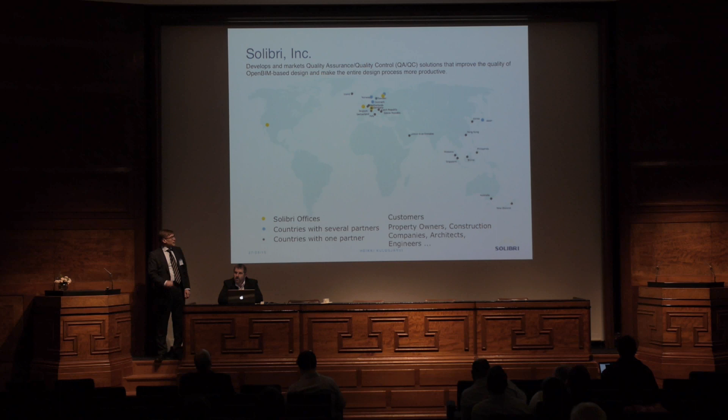A few words about Solibri. We are focused on quality assurance, quality control, and we do that based on open BIM files, so we are not doing anything else, BIM files always. As I said, we are headquartered in Helsinki, having offices here in UK, run by Dave Jellings, also offices in Germany and the United States.

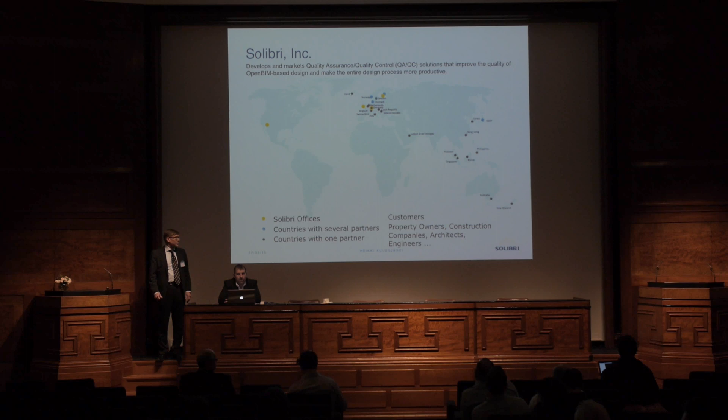Then we have partners, the black dots, over 20 different partners in different countries. Our partners in the United States are not listed here, but there are quite a few there as well. Our customers typically are property owners and construction companies - these two groups typically have most to gain when having good quality. Also working with architects, engineers, and also lately inspectors.

Solibri is about rules, having checking rules of different kinds, and we have quite a few of them. Don't worry, I'm not going to list all of them or talk about all of them, but I will take some examples of this.

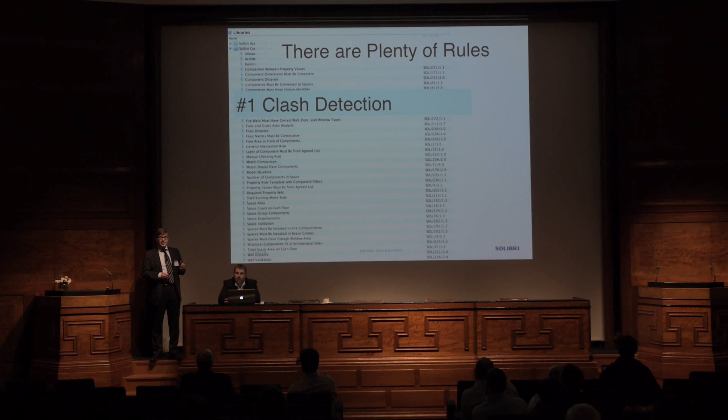For us, it started from clash detection - that was the first thing we did many years back, and we are doing a pretty good job on that. Of course, we think that's the best product in the world for doing just that, but it's only one rule that we are doing. We have quite a few others: whether something is missing from the model, egress analysis, comparing model versions, comparing architectural and structural files, checking if we have load-bearing walls in the same location, and so on.

I'm picking up one of these - rule number 222, component distance, as an example. Here's one use for this rule: clearance. Do we have enough clearance? In this case, this is a picture from Japan, so obviously it's getting a little bit tight.

This same rule is actually a template, so we can twist this rule to do several things. Clearance is one. We use the same rule for soft clashes as well - then we change parameters a little bit. We also use that for making sure certain objects are close by, not further than a certain distance between each other. So it's used for many purposes - these are rule templates that our users can modify to do certain tricks.

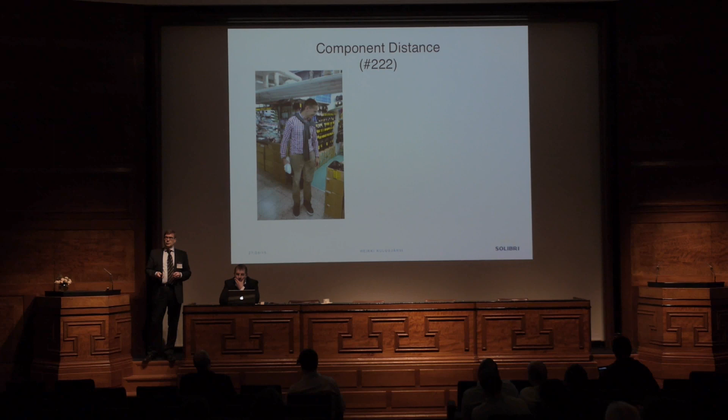They told us they use this rule for that purpose, and the thing is, if I simplify what they think about: you can think of the foundation as a cup, and then you have your columns inside that cup. But because of earth moving, you need to have clearance so that concrete doesn't hit concrete. They use this rule to check that there's enough clearance. So this same rule is also an earthquake rule - very interesting, I'm so delighted to see and hear that these things work like that.

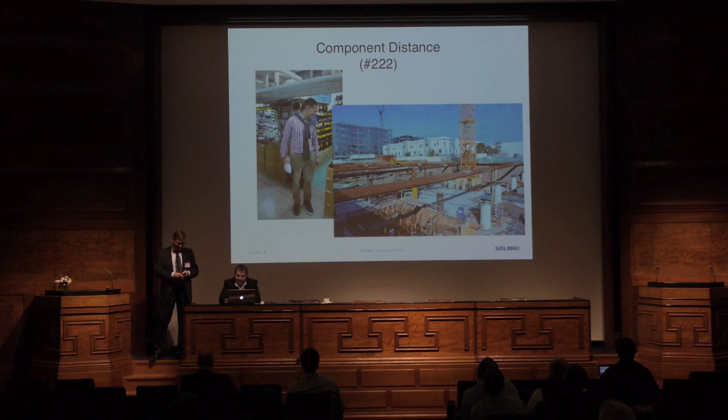And all these rules can be adjusted.

Today our main issue is to talk about COBie - we selected this as one of the things we do. Earlier this week we introduced the accessibility rules that we have in Solibri Model Checker. Maybe some of you saw that - did any of you see it? Not anyone in this room. Okay, but this will go through many of the basic steps that Solibri is doing, so that's good.

I guess this is a good point to give Simon the opportunity to show the real stuff. Simon, please.

The first great starting point was a mention from the last presentation about the quality of the output. Everything we're basing our COBie deliverable on is related to the IFC file that we're pulling into Solibri, and the configuration of that IFC file is of paramount importance—understanding the options and checks you can carry out.

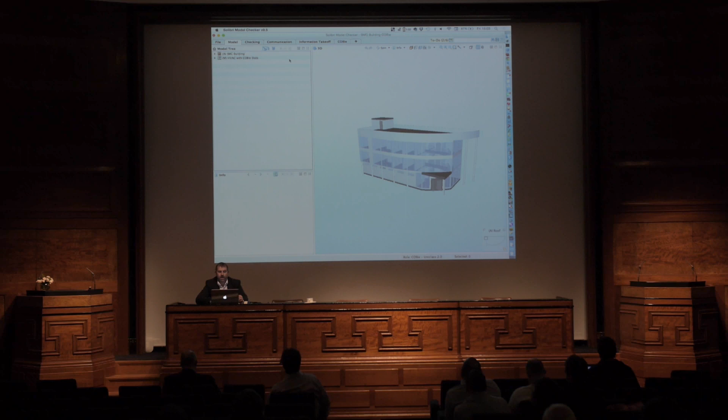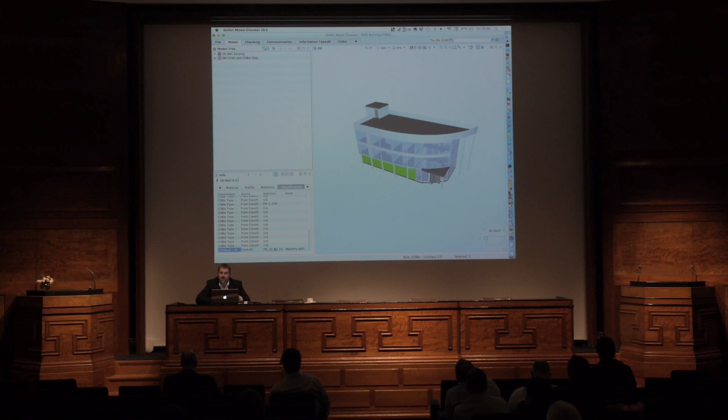Okay, so first of all, if we look at the model itself, if we just select a component in the model, so this wall here, down the bottom here we end up with the data that's been exported from the IFC model. And then when we click through the different tabs here, you can see that we've got certain information that's attached to it. And if we go to the classification area here, you can see we've got a Uniclass classification. Okay, it's Uniclass 2 because that was when I originally created the file. But you can see it's got a classification that's been applied to it. So there's data that's placed in this model which can then be used for COBie.

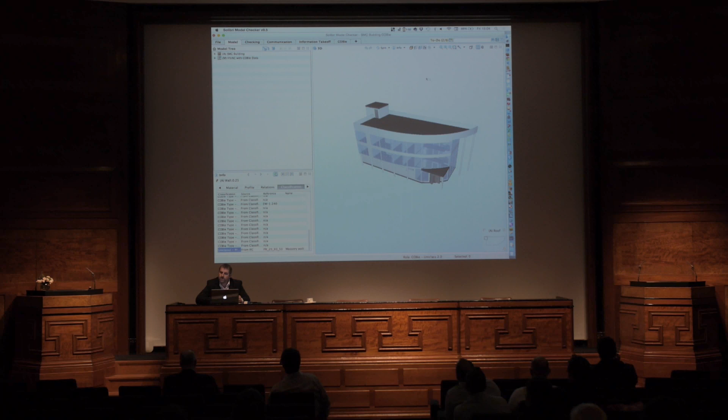Now what we're looking for is a consistent set of data in a relevant set of locations. Now, Solibri Model Checker gives us the ability to take the relevant pieces of information. And actually, depending on however many applications we take the data from, they may have put the data in different locations. The classification system, and this is something to be aware of, classification inside Solibri does not mean classification as far as things like Uniclass, New Rules of Measurement, that type of thing. Classification is a way of restructuring the data in order to be able to visualize it, use it, manipulate it, pass it into rules, that type of thing. So it's a different lens on the view of the actual model itself. Hugely powerful and gives us lots of flexibility.

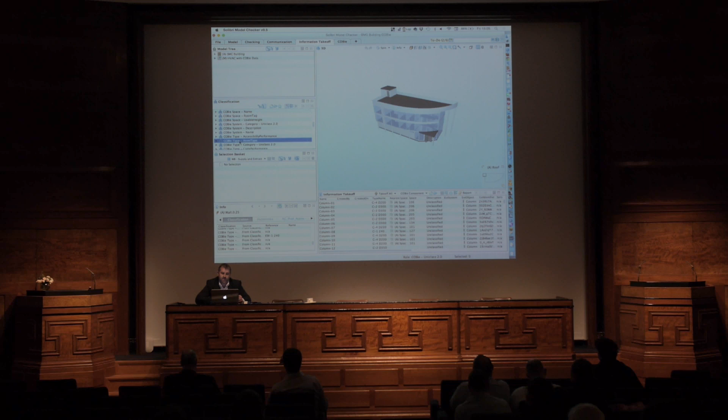Now, I've just used it for one other purpose here. So the idea behind this is that for each of the fields in the COBie spreadsheet, I've created a classification. If I go down this classification and I take something, for instance, like the asset type. So the asset type should be one of two values, either movable or fixed. And if I open this up, it shows me the values that have been created. So as I click on this item here, it shows me all the components that have that value set within the different authoring systems. We also have one that says not applicable, which means they haven't bothered setting it at all. Okay? Or we've got the mapping incorrect.

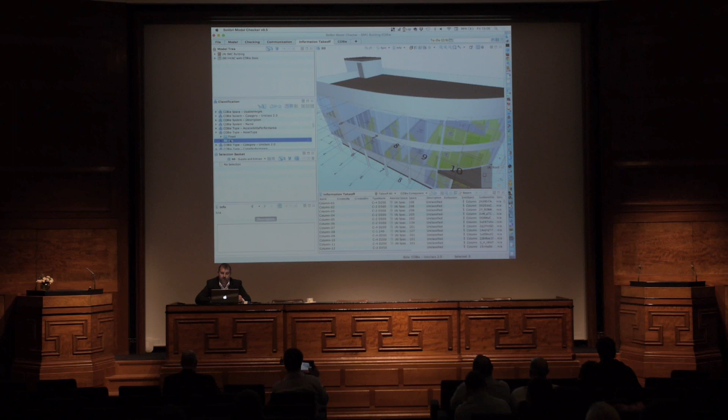Okay. So if I pick on the asset type here and I go to the settings for this, we have a criteria-based sort of application here which goes and looks for data in different locations. So I've automatically set the template up in the background to work dynamically for the architectural tools for Revit and for ArchiCAD. Bentley's coming online very shortly, and so is Vectorworks. But if they conform to the default IFC locations, I have very little work to do. So both of them seem like we can get the standard definitions out for this information.

So for instance, if I look down this list here and I'm looking for type asset, what this actually does, it says, if I'm looking in ArchiCAD here and I find a value, if I double click, I go to this property set to go and find it. So the guidance for ArchiCAD is that they put the data in the relevant place, and it's meant to be under COBie asset and asset type here. So it goes away and looks in that directory or that property set for that piece of information.

For Revit, because they don't create property sets, you have to actually use the default property sets that are inside the software. Everything gets placed under an area called data. Now, there is a possibility of mapping that out and putting it back to the COBie asset area.

The trouble with doing that is if we remap it out, then the IFC file that we export doesn't represent the model that's in a Revit format. So there's some sort of disconnect there because we're not really supporting the ability to create true property sets. But what we've done here is we've created the mapping system. So for any software, wherever they put the data, it doesn't restrict you to change that location.

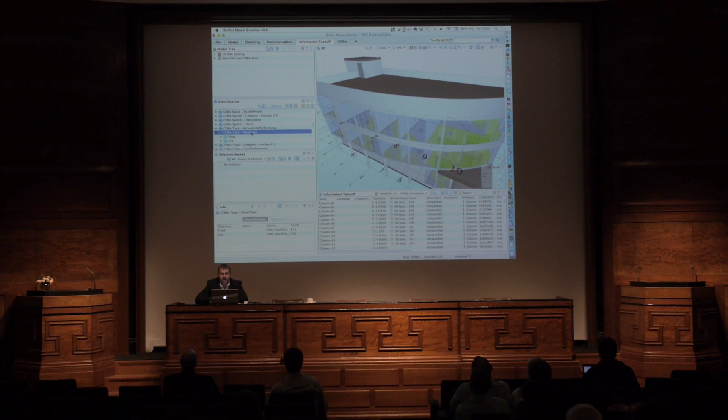So the key thing is this gives us a combined list of the data for each field in the model. So if we had 10 models in here, we could specify where the data is, and it gives us this one list. Now that list provides two pieces of functionality. It provides a route to actually populating the sheets once we're happy with the data that's there, but it also gives us the ability to drive the checking of that data from this location here.

It also gives us the ability to say what kind of elements do we want to actually check in this list. So for a type element, we might not want to check sub-assembly elements of things like curtain walls, that type of thing. We may want to check the main element. So it gives us that flexibility.

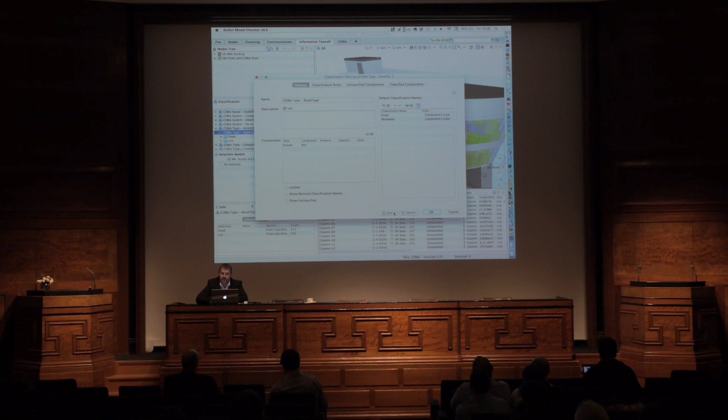When we go over to the checking area, we can then go and pick which software was used to generate the architectural model. Now, the architectural model is the key one because it's going to generate the first load of data submissions. So your COBie drop 1s, your CIC stage 3s, basically up to 3s. And the idea really is that they'll contain the spaces and the zones and the facility information, the floor levels, that type of information. So it's key that we pick the architectural software as being the major definer for the zones in the building.

And I've already set up the ArchiCAD and the Revit ones in there. The model here is an ArchiCAD architectural model, and an M&E model from Revit. So I would pick ArchiCAD here from this list. And what that does in the background, it tells the software that when it runs the rules, it's looking for the data in the right kind of places. So it's already pre-configuring that in the background.

Then what I can do is say, what stage am I generating the data for? So we have a complete set of rules which are based upon the demand matrix. And the demand matrix in COBie is a copy of the spreadsheet, basically, the output. And on every field in that spreadsheet, there is a CIC stage value. And it's when the data is expected to be populated in that field. So what we've done is we've created the rule set to represent the demand matrix. So at any point in time, if you're the data manager or a COBie coordinator, you can say, what stage am I generating the data for?

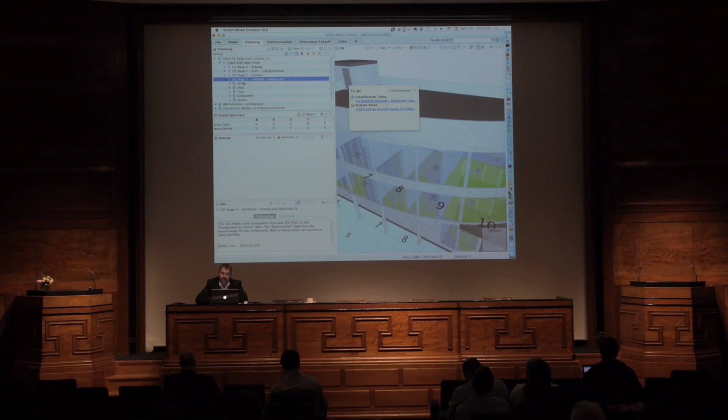So I can say I'm creating it for CIC stage 3. And I say OK to that. And if I open up the rules on the left-hand side here now, the rules drop down to level 3. So I can say here that everything that goes through this stage here, once I fix the issues in that, then I can go through to the COBie sheet to actually then start generating the data.

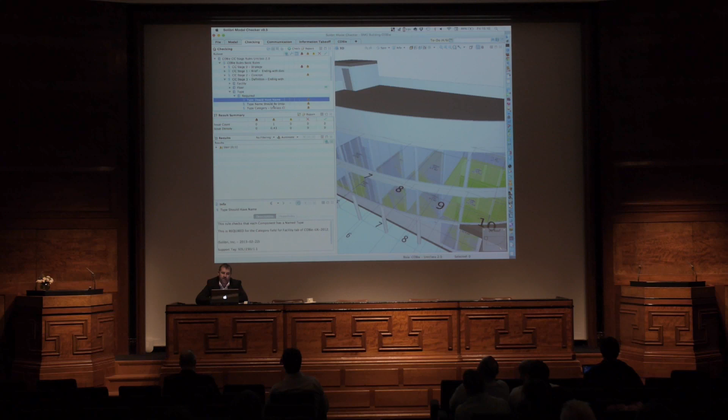So the idea behind it is that once we've got the rules in here, we hit the check button. The check button in Solibri then runs through the rules, evaluates them, and tells us where there's missing components, or problems with components, or data not present. So for instance, if we go to the type area here, we've got required components that should be there for the type. So the type should have a name. If we click on this first one here, it says type should have a name, we can see down the bottom here, we've already got issues.

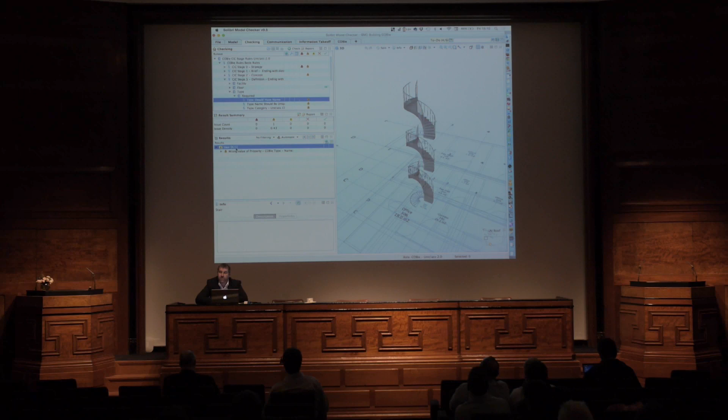So when I double click on it, it shows me the components in the 3D view that are missing data. In this case, they haven't got a type name. And to prove that point, if we click on one of the staircases and we look down into the information with the identification, the field here for type is blank. So the idea is that in certain software solutions, these kind of things are possible. In others, they're not. So we need to be aware of the kind of problems that can actually occur.

If we go down to some of the other issues down this list, if we go down to components, it says components must have name. Okay, so we've checked they've got a name. Okay, that's fine.

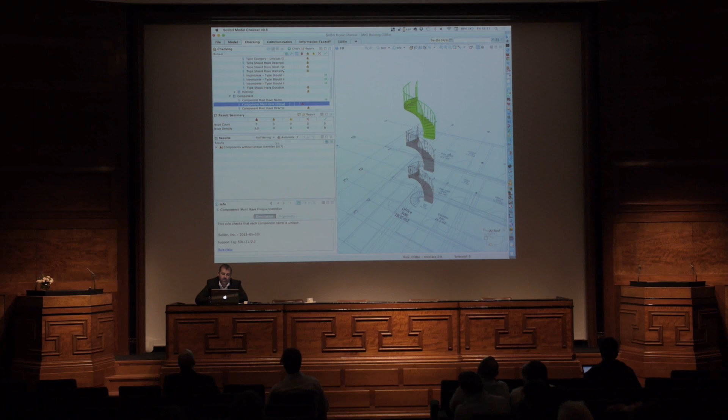And it says the components must have a unique name or unique identifier. So if I double click on this, the unique identifier for a component is in the component sheet, and it's column A. And because we're dumbing down a data source that we're looking at at the moment down to a spreadsheet, what we're actually dealing with is the names of components.

Actually, if we look at it from an intelligent model perspective, every component knows that it's unique because it's got its own global unique identifier, and it has its internal identifier within the software as well. But when we put it into a spreadsheet, we're using the name for that component. The reason why we're using the name is that the system sheet lists the name of the system, but then lists the component names, not the GUIDs or the global unique identifiers.

So a lot of this kind of information we're having to dumb down. The models contain a lot more intelligent information, but obviously we're dumbing it down just to a structure that could be read in by a database from a spreadsheet.

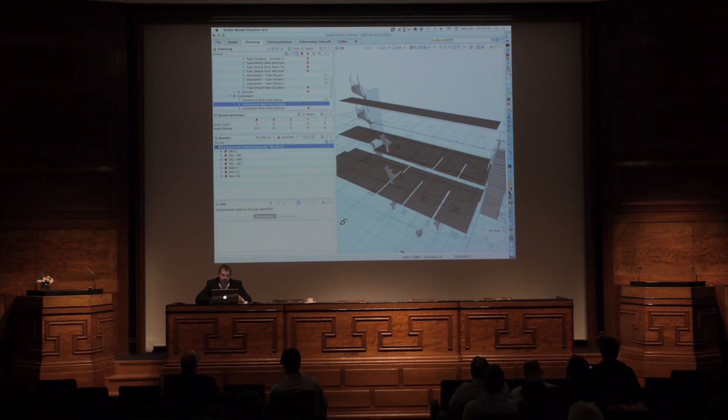So what we've got here on the screen is all these components don't have unique identifiers. So when we go and click on one of these areas here, these walls that we see here do not have a unique identifier. So when I select it, where it says the name of it, which is EW3, all of these have got the name EW3.

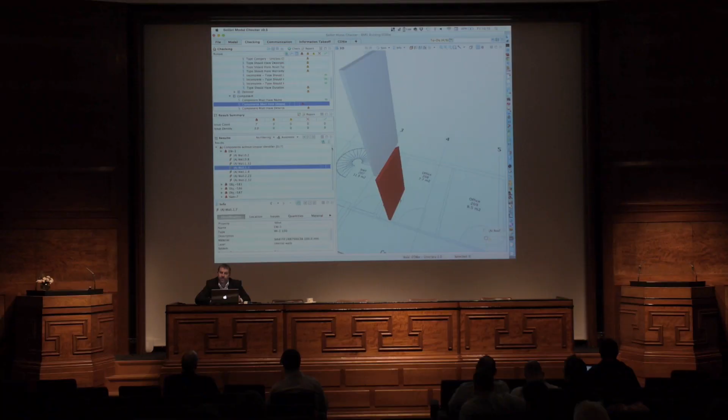Now the great part about this is, and you heard in the last presentation again, once we've found an issue like this, we can right click on it, add a slide, and we can specify what the problem is. When we go to the Components tab then, it lists all the components, and those components go into the BCF file, if we export a BCF, and can then be dynamically passed through to the design teams to fix those issues. We then get the resultant IFC file back, and hopefully when we rerun the rules, it fixes the problems. We don't have the problems anymore.

So the idea is we run through this section, making sure each of these items have been fixed. We get the new models through, push the button again, and hopefully they should all say OK, or they should have a tick next to them.

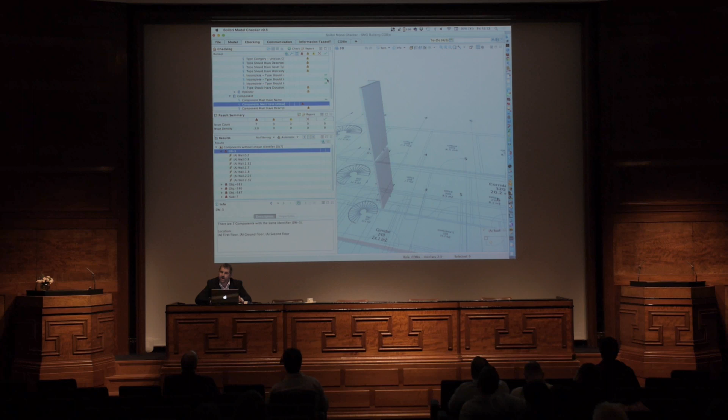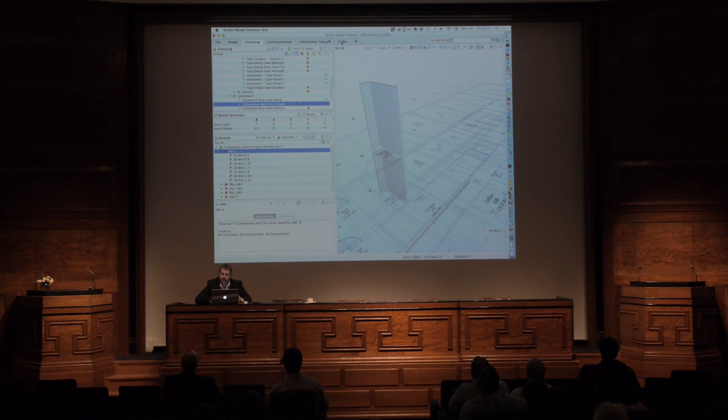Once we're happy with that, we can then move into the functionality in the software as far as using the COBie add-in. So the COBie add-in actually exists on the tab, and you can see here we're now looking at the COBie settings. So we have to load the COBie settings up. We can specify whether it's using Uniclass 1.4 or 2, and obviously when we get the new version through, it will only be a case of adding the extra components in there.

So if we just add in the COBie Uniclass here and say open, it loads up basically the template. The template at the moment is empty, so when we click on the relevant tabs here, you can see there's no data in any of this at the moment.

The functionality inside Solibri gives us the ability down the bottom here. I've just added in another view called the Information Takeoff view. And this is what I was getting at, the fact that even if we haven't got a COBie add-on, each of these areas here could be configured to mimic one of the sheets.

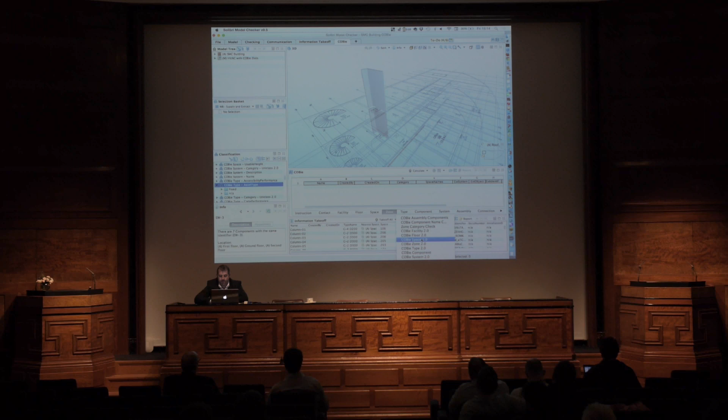So for instance, if I go down to, say, the type list, you can see here I've got pretty much what a COBie spreadsheet is. So when I click on any of the elements, it shows me the graphical representation in the screen. And so what we're actually doing is mapping these classifications here into the relevant tabs.

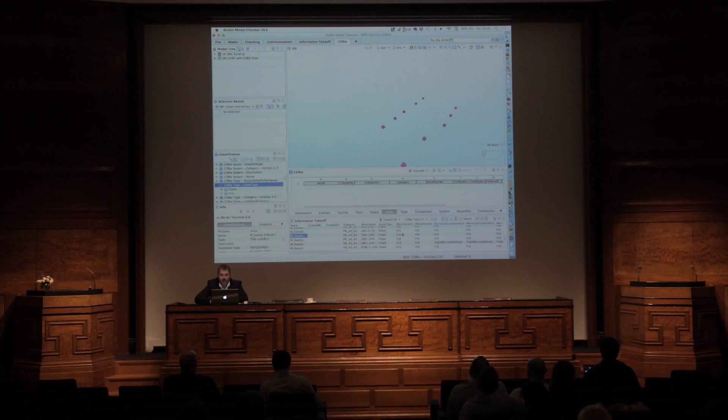And as long as the names tally up, what we can do then is hit the calculate button here. I'm going to turn something off first of all, because we haven't configured it yet. So there's two tabs here called attribute and coordinate. While we're actually looking at the data and generating and manipulating it and spotting errors in it, i.e.

We're not exporting the full output, we don't really need to calculate them. Okay? So what we can do is actually don't fill those two areas. Now each of these other ones says here fill from information takeoff. So what we do is we assign an information takeoff to each of these, which provide the information from the locations within the software. So they're coming from the classifications, and we store them in these information takeoff views.

We say OK to that, and when we click on the calculate button here, say calculate anyway, because we should have gone through the rules in order to calculate the data. It then has populated the sheet. So it's filled in the facility, it's filled in the floor. When we double click on any part of the model, it shows us graphically that part in the model. So you can see that every time we click on anything, it's showing us the components plus the spaces that are related to those components.

So if we go to the actual Spaces tab, we can click on any of the spaces here, and it will sort of cycle through where they are in the building. Now, if we select a number of them in one go, and then go to the Info function, we can also select a space in the model, hit the information icon here, and it takes us directly to the line in the sheet where that component is. So it's a bidirectional link between the spreadsheet we can see at the bottom here and the model that we see in the view. So it's interactive, gives you the ability to actually look both ways, really.

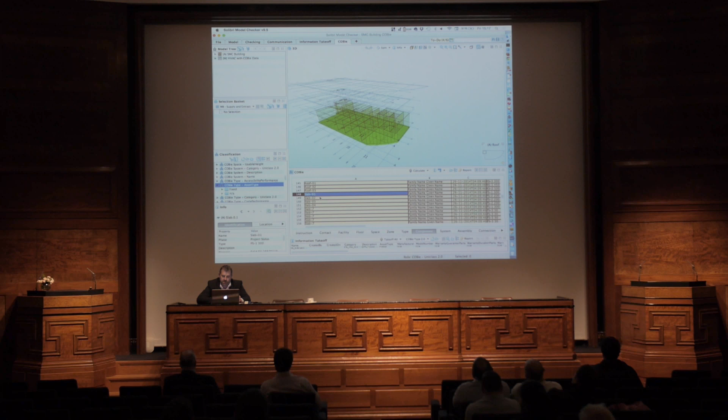First of all, I'll take, say, the slabs, for instance. If we take the slab which is on the ground floor, it shows us all of the spaces that are connected to it dynamically. It understands the relationships between these elements. If I go down to the walls here, and pick, say, wall 41, you can see that if I zoom in, we've got a doorway here that's then connected to these two spaces. But if I pick the next wall down, you'll see that it actually adjoins and is adjacent to those spaces.

So we're seeing a relationship, which is inherent in the IFC file, between these relevant components. And that's displayed within the sheet here under the actual space names that it relates to. So we've done a lot of work to make sure that it gives the correct spaces for the right types of components. It's quite important.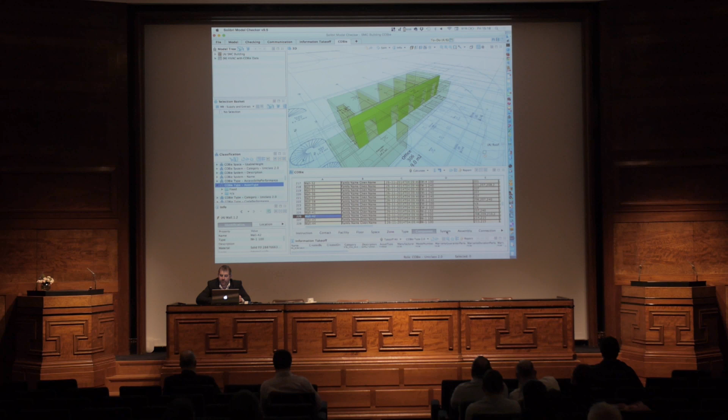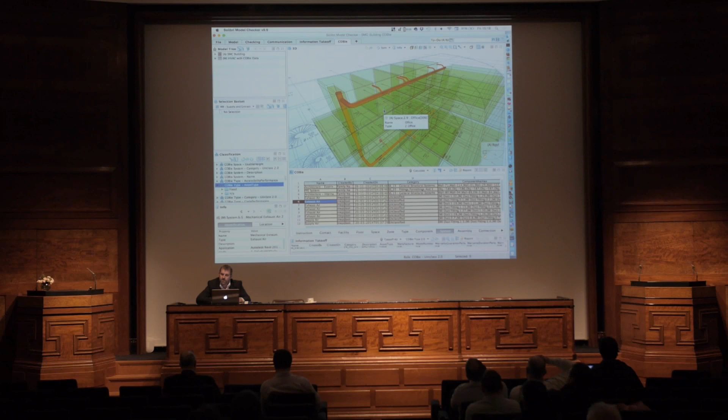If we then move on to the System tab, we can see that each of the components have a system relationship and a space relationship, but the system also understands the components are related to the relevant spaces, and then which combined spaces it relates to. So in this case here, we can see that the system is showing all the spaces that system is related to and actually provides data for.

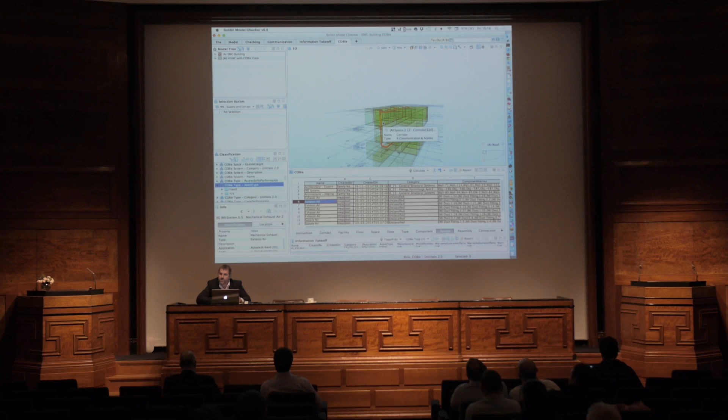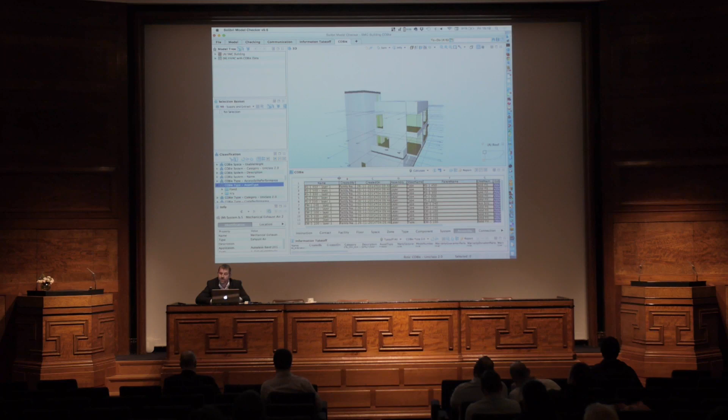So again, it's filling this information out automatically, and again down to the Assembly tab, where it's taking either layer-based components, which are structural components with their relevant materiality, or assembly components, and listing out the individual components that sit within the assembly. So this is all being done automatically for us.

The key thing really is the rules in the background and making sure that we're not putting in things that are duplicated. So on one of the projects we ran, we had a precast staircase in a precast concrete model, and we'd also got an architectural model. Both had the same staircase in it. They both exported IFC files, and if we'd just taken them and put them into a COBie generation tool, we'd have had two staircases there. Okay, so there's some really simple things that happen with the system.

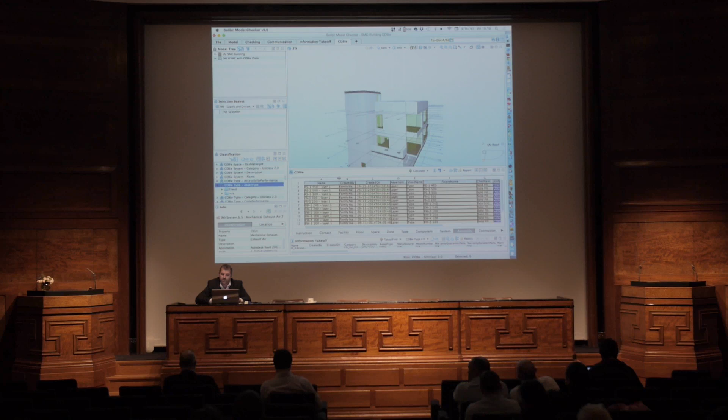Now, obviously, the other thing that needs to be brought to the front of the project and analysed first of all is a clear definition in the employer's information requirements, the EIR, as far as what components, so what assets, should actually make part of the deliverable for COBie.

So it's been very loosely defined on some of the projects I've worked on. Others have been very tight based upon the client itself. But actually, for us to get a meaningful COBie deliverable, it really has to come from how the maintenance of these components is actually going to be run in the FM systems later on. So that would define what parameters are required and what asset components should actually make part of the COBie deliverable.

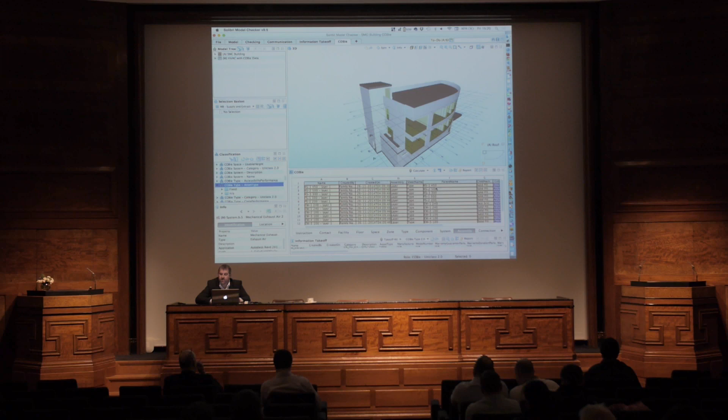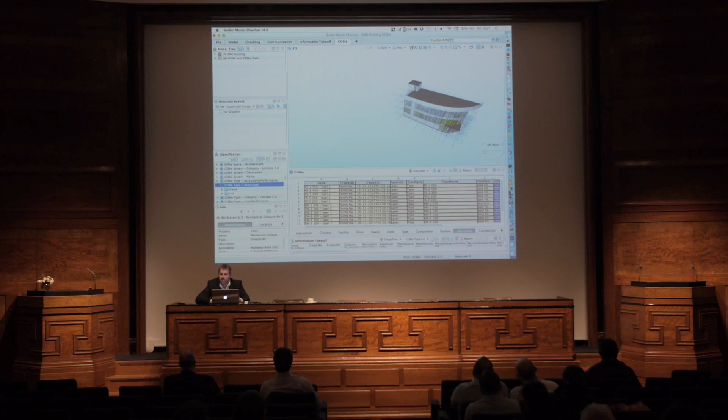Now, obviously, there's multiple ways we can do this and see the information on the screen. We work in two key areas. The information takeoffs that generate the data in the sheets, we can create a list of the component types that should actually be included or not included. So if we go to this icon here, which is our COBie settings, this one here, which says Show Components, if I click on it, it gives us a view automatically of what are included and what are excluded components. So if I go to the included components, first of all, it shows us our model, and it shows us the type of components that are included within the COBie deliverable.

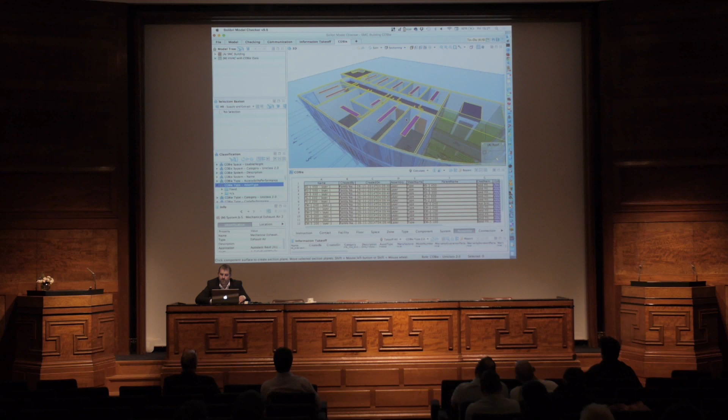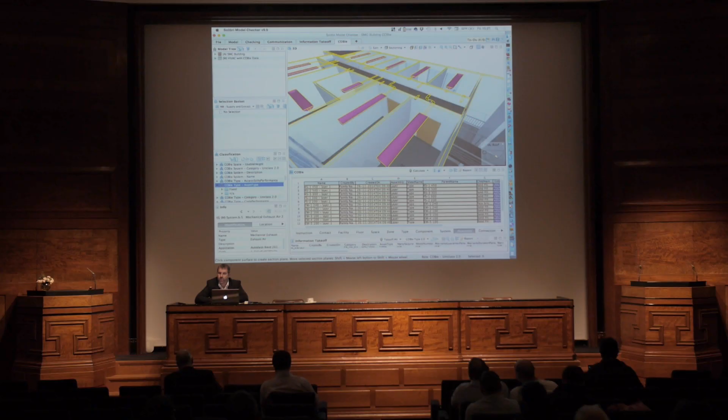So if I now use some of the visualization techniques inside Solibri to show you this a little bit more, if I take this part of the building here, and I turn off the section view and turn off the spaces, what we're now looking at is a way of visualizing any element that is going to be part of the defined asset in a solid view. So you can see these extracts or the emitters into the rooms, basically, the grills are in solid, whereas the actual pipe work here and the pipe fittings are not included at all. They're in wireframe. So if we switch that across and we say, now show me what are excluded, you can see we've got the opposite now. And it gives us a very detailed view on the project.

So what we're doing here is trying to give you the best graphical view of exactly what your COBie sheet is going to deliver. So you've got your definition, and you can then visualize exactly what's part of it. So we may find that on the project we worked on, there were some rodding access points for the outside of the building. Essentially, they're not part of COBie, but if they've got a maintenance factor applied to them and they're needed, then they can be included. Now, the issue is drainage isn't included within IFC, as in it's not wide enough of a remit to include drainage components. So if we created things like rodding access points, they would come across as something like pipe fittings.

Now, what we're looking at on screen here is these elbows are pipe fittings. And if I remove them from the list and say don't include any pipe fittings, I then lose the rodding access points. What it gives us the ability to do in Solibri is actually take these in or out of the excluded list. So we work on a broad brush basis first of all, and then we can either include elements by overriding the default or exclude them.

The other method of doing that would be to have a Boolean operation within the authoring software that said deliverable in COBie or not. Now, Revit has one that says COBie. It's just a Boolean operation. And if you check it, we can use that list to derive the automatic generation of what's included and what's not. You still have to have the discussion with the client as far as what they actually require. So it gives us the ability to use the selection basket we've got inside Solibri to narrow down the kind of components that should or shouldn't be in there.

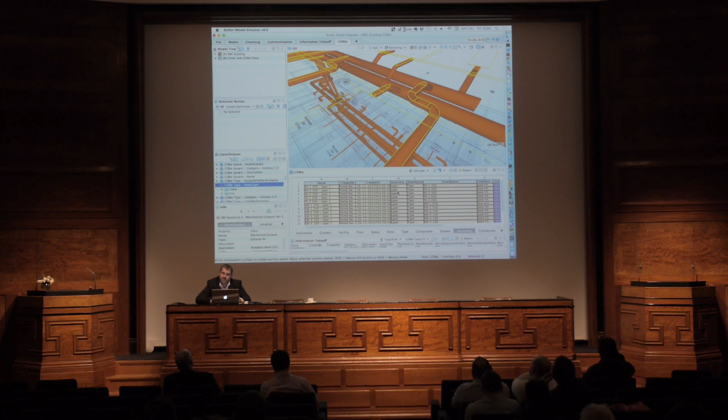At the moment, what we've done is we've generated a sheet that's applicable up to, say, CIC stage 5, which would be ready for the installation of components on site. And then what we can do is create subsets of those sheets based upon work packages. So down the bottom here of my classification area, we've got another classification we've created, which is looking at supply chain data. So this hones down the number of components that the relevant supply chain member would be installing on site. And we can do that by criteria, or we can do it by selection in the model, that type of thing.

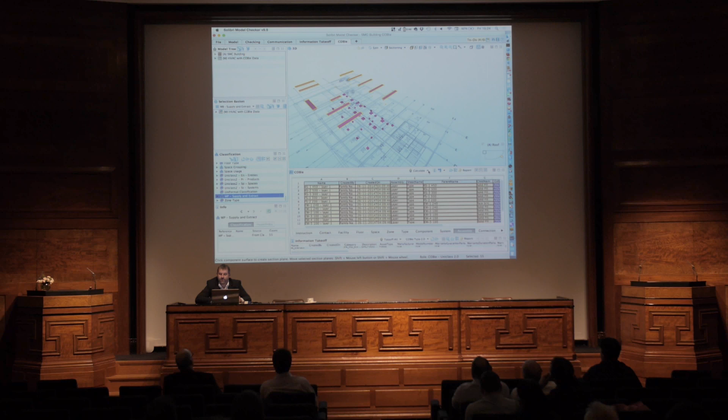We can then create a saved selection set of it. This means that when we click on the calculate function here, we don't have to calculate the whole sheet. We can then calculate the supply and extract area only.

When I say calculate, you'll now see that what we've actually got is a COBie sheet, and the assembly is empty. You'll notice that the spaces are full with the spaces related to those components. But if we go to the type sheet, we've only got the types that relate to these components here. So it gives us an automatic system which narrows down just the actual subset of data for those relevant bodies to fill in when they're out on site.

Now, obviously, another company I work for, we've created an online portal which sucks in these areas. You assign it to the relevant supply chain teams, subcontractors, and it gives them a simple form to fill in the rest of the data and then submit it back. And then we can push the data back into the authoring systems and regenerate the COBie spreadsheets.

So this is sort of the process that we do. It's very visual, it's very flexible, so we're not stuck when certain pieces of data don't come through correctly.

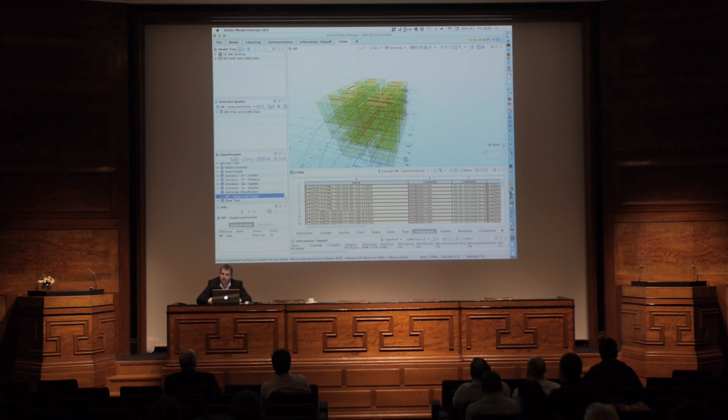So there's some classic scenarios where if I go to the settings here, we had to incorporate the ability to fix name formats. Although the IFC file generates information correctly 90-odd percent of the time, there's the odd occasion where it does these really weird things.

So for instance, if we were including things like skirting boards, whatever, if there was a maintenance task against them, it might be wall sweeps, crash barriers, any of those type of elements. They might be wall sweeps in something like Revit. Wall sweeps, when they export out, strangely enough, give you the component name, which is the family and the type, but it doesn't give you the individual internal identifier that's automatically assigned to every other component.

So what this gives us the ability to do is look at the name formats, and I can then create a name for it. So the data comes through - we've got the internal ID and we've got the component name, but it hasn't put them together. So in Revit it looks correct, but in IFC we've got a few little issues, and eventually those will be ironed out and fixed with the solution.

But in the meantime, we still need to get a COBie output sorted out. And for those components, we can create an item here that says, okay, for which sheet are we actually fixing the name for? We can do a filter.

So in Solibri, we can go and select a number of elements, so we can select just those wall sweeps of a certain name. And then we can go into here and concatenate two different fields together. So I could say the actual format would be name, which would be the family and type, which is there already. Then I put a colon and add in the BAT ID, which is the internal ID. And what I've now got is functionality which gives me exactly the same as all the other components that have exported correctly via IFC.

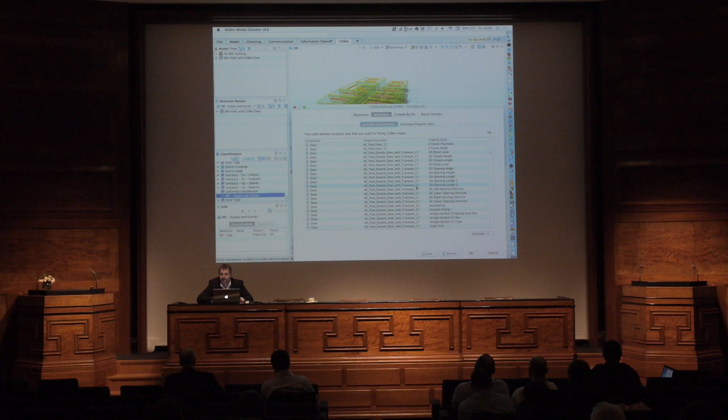Giving information this way is a good way of making sure you're not giving information you shouldn't give, and only giving the key pieces of information. So really look into what's included and excluded in the property sets, and what some of the other systems do.

So if I go to the System tab we looked at a moment ago, when we click on any of these items, this is a good example. If we have very long family and type names, some of the object libraries available actually give lots of problems for COBie. So we can end up with a long family name and a long type, plus the 7-figure number if it was in Revit format, and that would all be added into this list here.

The way the System tab works, you end up with a name for the system and the components that fit within it. The default template, before version 2.4, meant you could only have a unique name here. Once they introduced 2.4, they said you could have the same system name, but the actual components sitting within it can't be duplicated.

A lot of other systems don't create a concatenated list like this. In this list we've got mduct fitting 01, comma, then the next fitting — it's a concatenated list. We're never going to look at that list visually; it's going into a database, so it needs to be as efficient as possible and not restrict the generation of data.

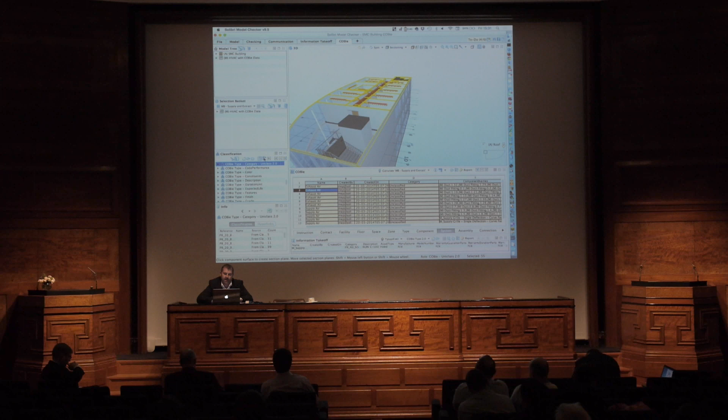The other thing we've done to stop people making typo errors and things like that, is for some fields — especially the Uniclass fields — where we go to the type category here, for instance, and open up the classification, it generates the data. Let's just wait for it to open, and there we go.

The classification in all the other examples just looks at different fields and checks if there's a value there, and the rules then check whether the value is correct or not. What we've done for classification is that all the peach fields you see in this spreadsheet at the bottom relate to other sheets.

They either relate to a previous sheet — so if we look at the component sheet, for instance, it says which space it's from, and the value here has to come from the space sheet, meaning it has to match a value in this column.

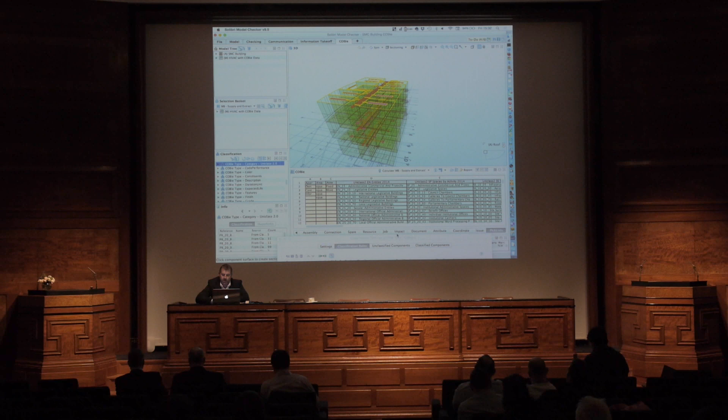When we get to the category, it relates to these fields here in the pick list. Many of the tools we take the actual values from, when we generate the sheet, check that the values in the field relate to the ones in the pick list, and if it fails, it tells you that you've got the wrong value. So in this case our classification looks through the value in the field and finds a code that actually matches.

If it matches, put the value in from the pick list. So we know that if we've got a matching code, we're going to generate a true value for the classification, even if somebody types in the value incorrectly within their authoring system. As long as the code is found, it generates the right data.

For our users, it's free. It's part of the Solution Center. It gives us the ability to federate models and then check and validate the data, making sure it's all correct. It gives a very flexible way of mapping the data to ensure we can get it from any location in the model. If it's in the default location, using the standard COBie add-ons, it will dynamically link into the right location, so it's almost a push-button exercise after you've done the checks. Then it's a simple process of exporting that data out to the spreadsheet.

Okay, is there any questions?

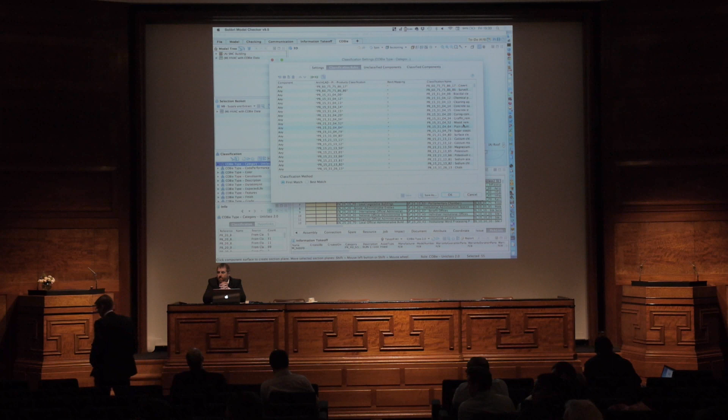Just going back to the system component names - the specification allows you to do it 2 ways. You can do component per line, which from a database point of view is a sensible thing to do. Whereas putting it all on one line, I think the thinking was that somebody was going to put it in manually. You can do it both ways. But in hindsight, putting it in manually when you create a complicated name is actually not very good anyway - it was going to be difficult regardless.

When people first started using the Excel spreadsheet, they weren't using the Open Office XML one, which meant there was a limit of 65,000 records. That meant when they generated data and then decided to cut and paste two spreadsheets together to create data or start with data - now we don't have that limit. But from a generation point of view, one component per line, in my view, is the right way to do it.

The second thing is that COBie was designed for managing components that needed to be managed for clients. So is it possible to say, for this client group, we don't want walls, because the client has said it's going into the PPM system, and the PPM system doesn't know what a wall is - it doesn't do anything to it. So it's perfectly possible to filter out a lot of that stuff, because what's worrying is that people are going to spend a lot of time putting in data that the client never asked for and then expect them to pay for it.

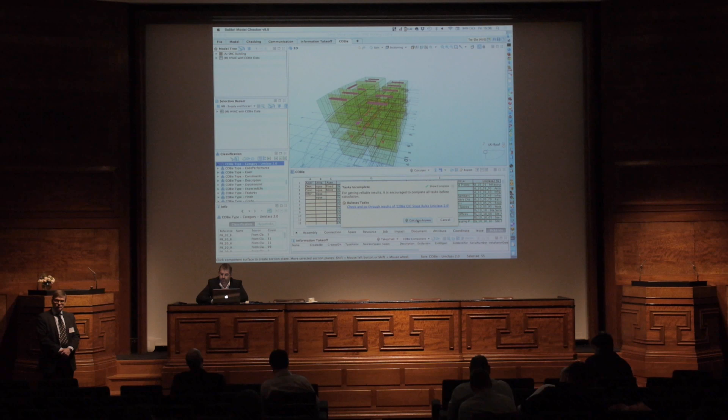So you help the client understand what their PPM system is - but it isn't just one system on the client side. They've got a range of systems, and each one is going to have a slightly different requirement. For instance, screen bookings is going to be completely different to PPM and reactive maintenance. People do have to begin to understand that. I suppose that within building smart, hopefully more client representation and more FM representation is going to happen - that's actually going to help.

Okay, so what you just said there, I've done within a couple of seconds - I've taken the walls out of it. It's not part of it anymore.

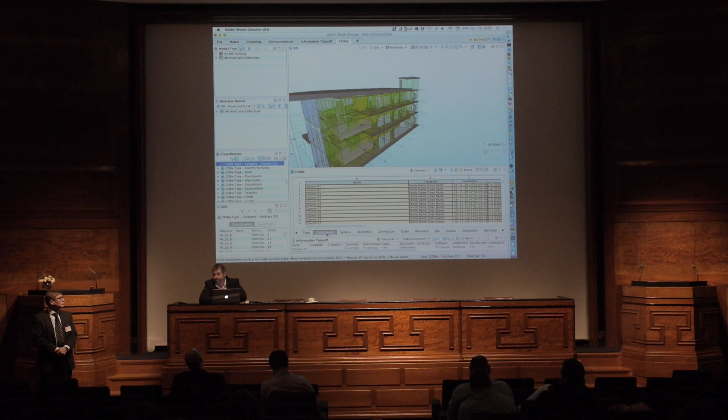Yes, no there isn't. No, I agree, yeah.

I've also noticed on there that 'created by' - that's not a valid email address. No, it's not, but that's just something I put in the field. From a generation point of view, what we've noticed with people's data, when they're filling it in the BIM application, they see a field called manufacturer, and they fill in the manufacturer, not the email. Then out in the IFC, what comes out is the name, not the actual email. But that's an education thing, of people understanding what they need to put in the fields.

And then the other one is when they put the same email address against all of the product types. Yep. That's like, what are you doing that for? You've ruined it. That's the kind of consultancy we offer on the jobs that we've worked on. I saw you doing the check there to say, right, those component names are missing, this is missing, but that just does not make sense.

You've now made it so that instead of having from the type to the contact, we've now got the type to 20 different contacts. Are you checking those sort of things as well? Consistency sort of checks like that.

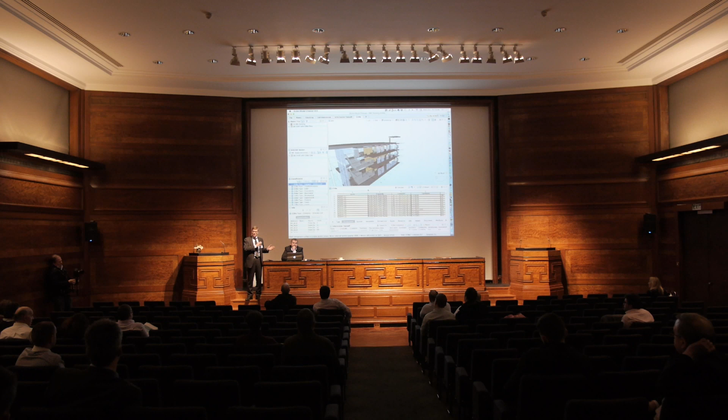It's a very good discussion, and it indicates that there's a lot of knowledge in the audience about COBie, and also we can do a lot with that. People may not all know of COBie, are there any other questions as well? It's clear that you can do quite a lot of things with Solibri Model Checker. This was very focused on COBie, but the general quality assurance that needs to be done for many other purposes is equally important for us and for our customers.

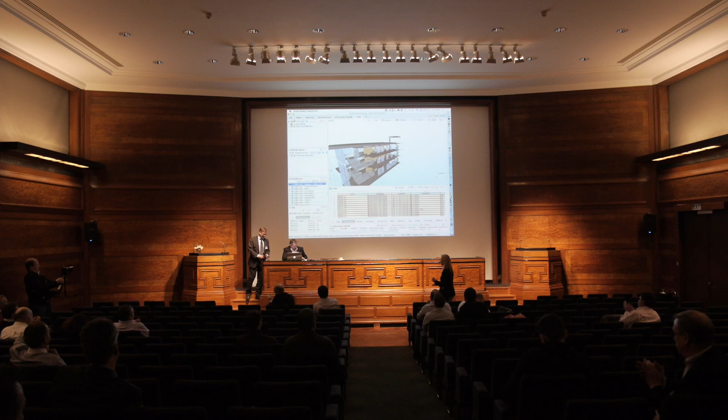Okay. Pub time. Yeah, okay. So, thank you very much. Thank you. Thank you for staying late. I know, like you said, pub time. Miller time, that's what we call it.